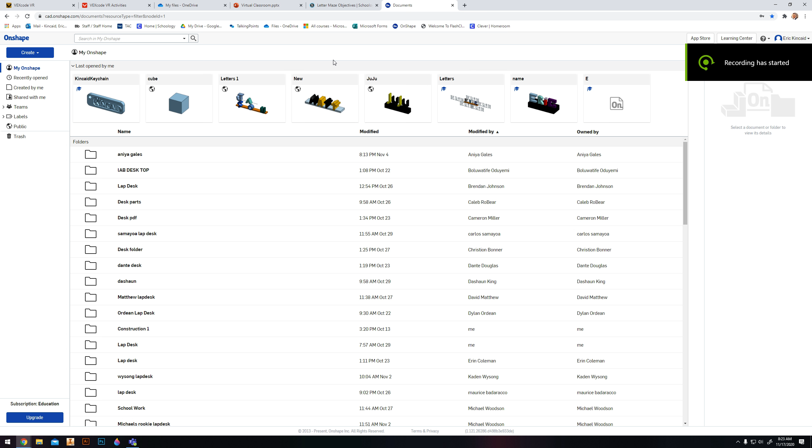Alright, good morning. We are going to begin our keychain assignment today, and we have all of the information from yesterday that we need dealing with the sizes of pretty much everything on this keychain. The only thing we missed was this radius here and the diameter of this circle. So I'm going to give that away right now.

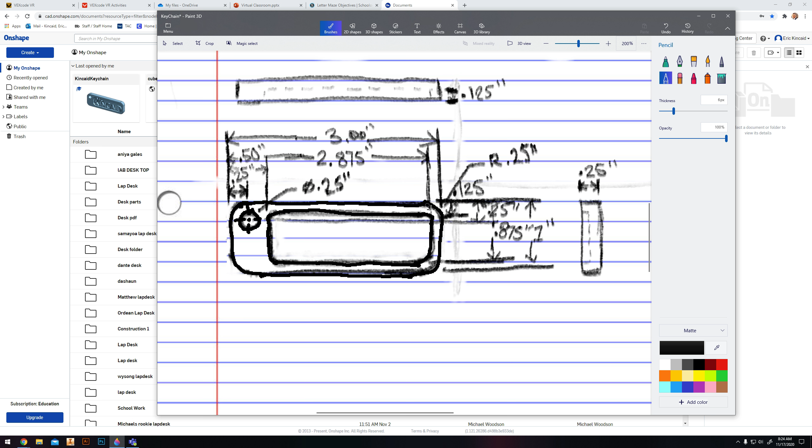That way we can get started with everything we possibly could need for this assignment. So this circle right here, that hole, this is the universal symbol for diameter, is 0.25 of an inch, so a quarter inch. And kind of hard to see, but this radius R is also 0.25 inches, right? So that's the radius on the outside of that keychain. Two dimensions that we missed that you will need in order to complete your assignment.

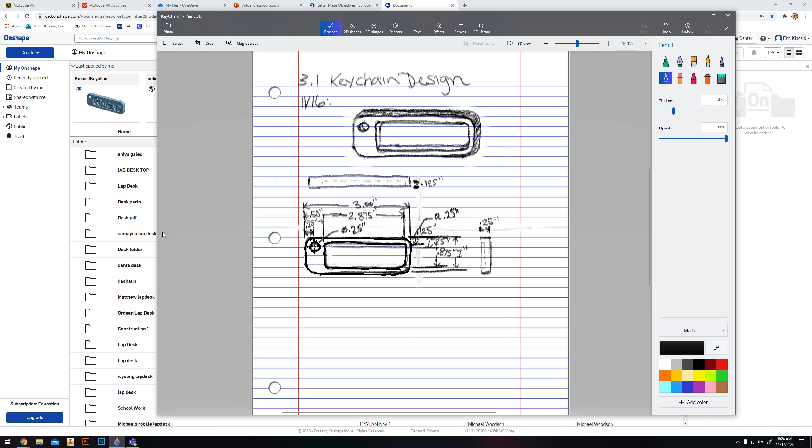So let's get started in OnShape. First thing we're going to do is create a new document. We're going to name it our last name and then keychain. And the first thing we're going to do is draw the outside and kind of work the outside in of this shape.

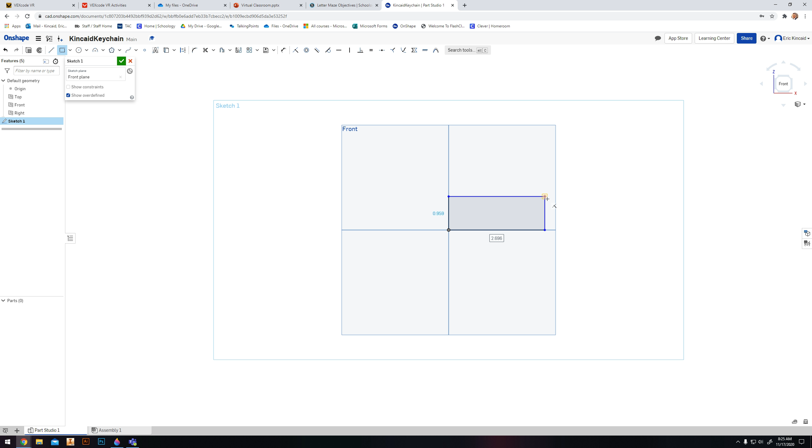So I'll create a new sketch on the front plane. Take my rectangle, and we're going to draw a rectangle first, and then we'll come back and round everything after with the fillet tool. Our dimensions based on that drawing was 3 inches by 1.

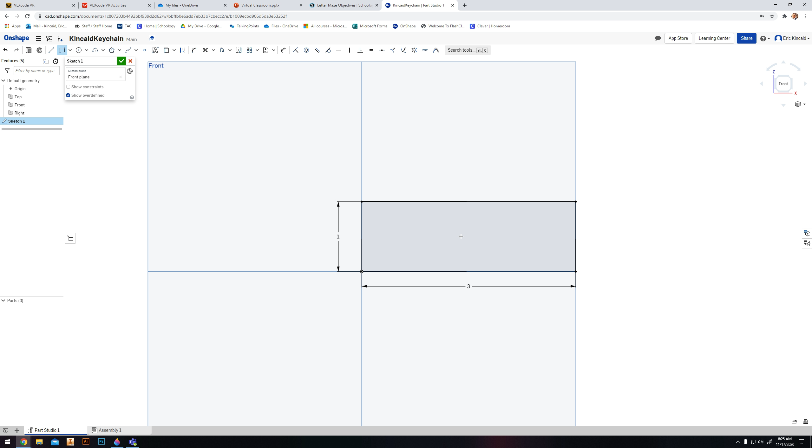And actually the next thing that we can do is add the hole in it, because we're going to extrude this to our overall shape. And then we'll be able to extrude that rounded rectangle inside the overall keychain shape. So I'm going to take my center point circle and we're going to create that first.

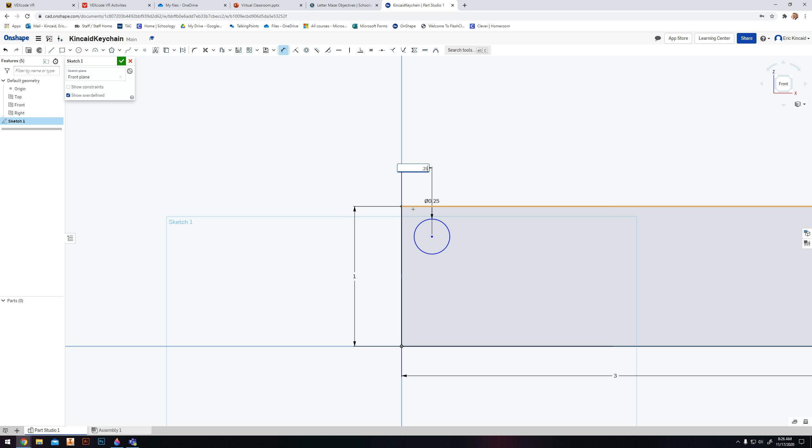So I'm just going to click somewhere in the top left corner of this rectangle. It doesn't matter. I'm going to make that 0.25. And I'll use my dimension tool to put that in the right place. Based off that drawing, from the center point to this edge, it's 0.25, and from the center point to the top edge, it's also 0.25.

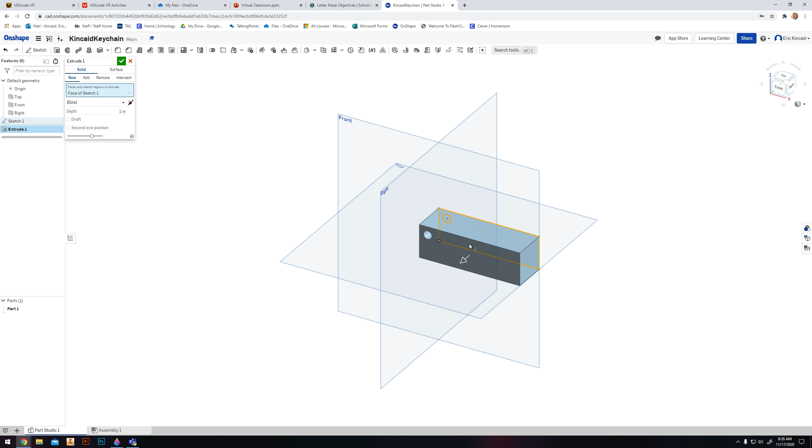And the reason that I do that first is so that once we extrude this, I can extrude that circle into my shape here anyway. So I'm going to extrude this 0.25 because it's a quarter of an inch for this keychain, and hit the check mark. That gives us a nice rectangle, not quite rounded yet, but we'll get there.

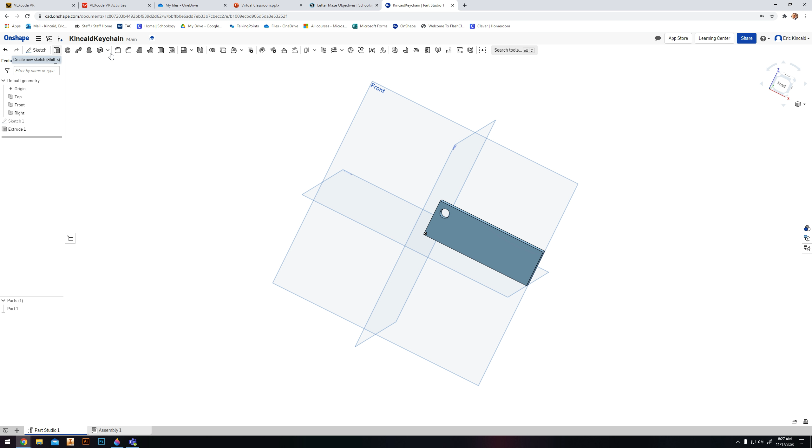And now we're going to use a trick to offset exactly where to put that rounded rectangle. So what I'm going to do is start a brand new sketch. This time I'm going to click on the front face of this shape so that I start the sketch on it.

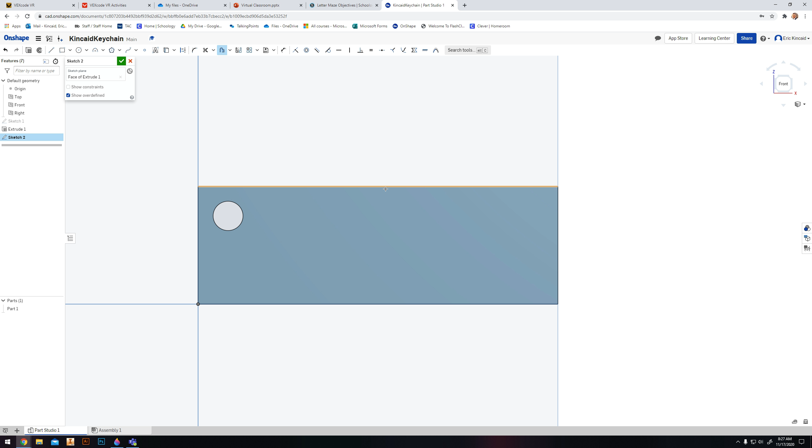And then I'm going to come up here to the offset tool. It's also the O. And if I click on the offset tool in the top part of my rectangle, you'll see it wants to draw a line that's 0.25 of an inch below it. Instead of 0.25, I'm going to make that 0.125. So I'm going to hit enter, type 0.125, and it'll draw that line right below it.

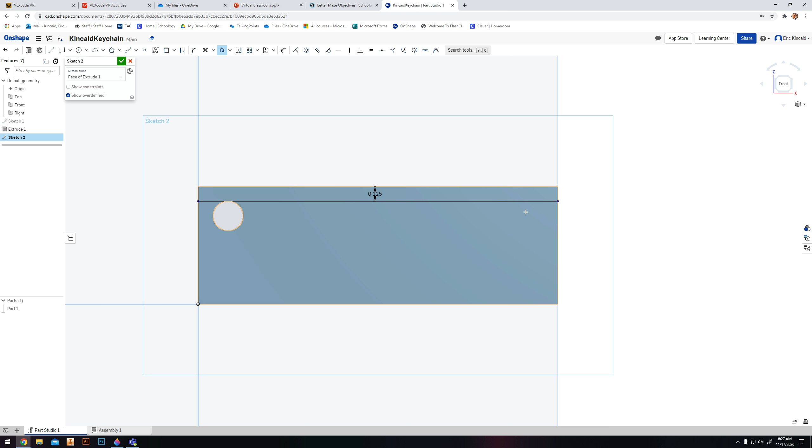And I'm going to do the same thing here. Move this back in, enter, 0.125. So all I did there was drag it from one side, so it'll do it again here. I'm just going to grab this arrow and pull it upwards instead of down. 0.125, enter.

And then for this last one, I'm going to offset it 0.5, and the reason for that is if we left it at 0.125 or anything like that, you would have your rectangle inside where your circle area is, or your circle area would be inside that rectangle rather. So we're going to make this 0.5, and then that pushes it out and away.

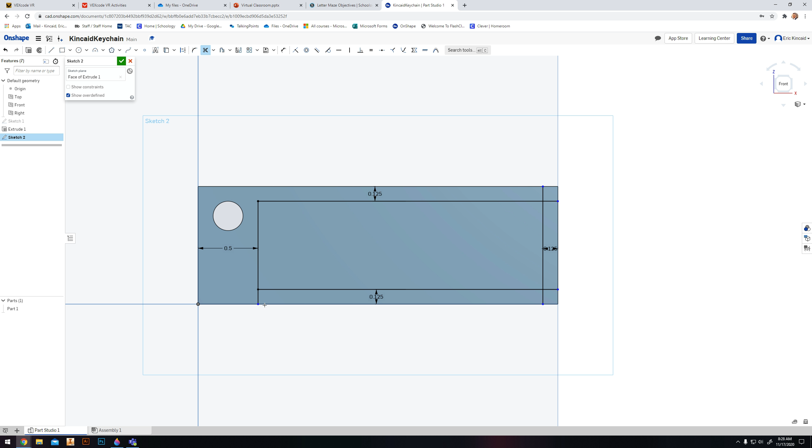Right, so I'll use M, my trim tool here, and I'm going to trim all the extra pieces so that I have just the rectangle left over. I'm just going to click on each of these. Whoops, clicked too many times. Control Z, undo. Trim, click, click, and you're left with a nice rectangle.

So we didn't fillet the sketch for the actual rectangle, the outer shape, but we are going to fillet this sketch before we extrude it inwards, because it makes it much easier to do now for this sketch. We don't have to worry about offsetting or anything like that.

So the reason we didn't fillet the sketch right off the bat is it doesn't let you offset your full lines all the way across. So by waiting, we're able to use that offset feature much quicker.

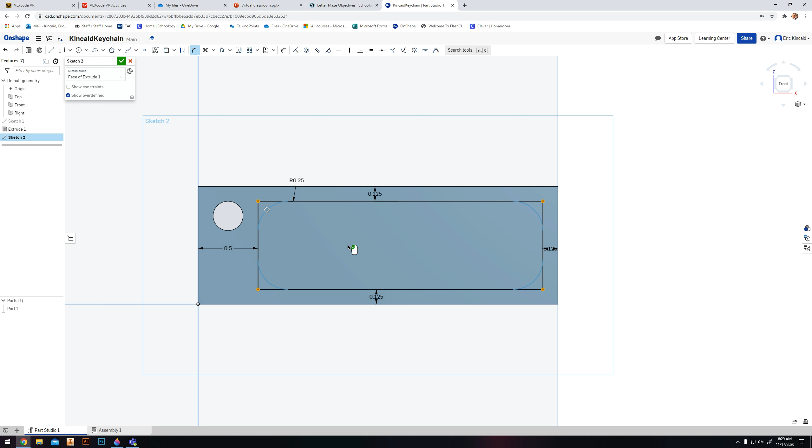So we're going to come up here to sketch fillet. That's Shift F on the keyboard, and we're just going to click our four corners and leave that radius to 0.25, and hit the check.

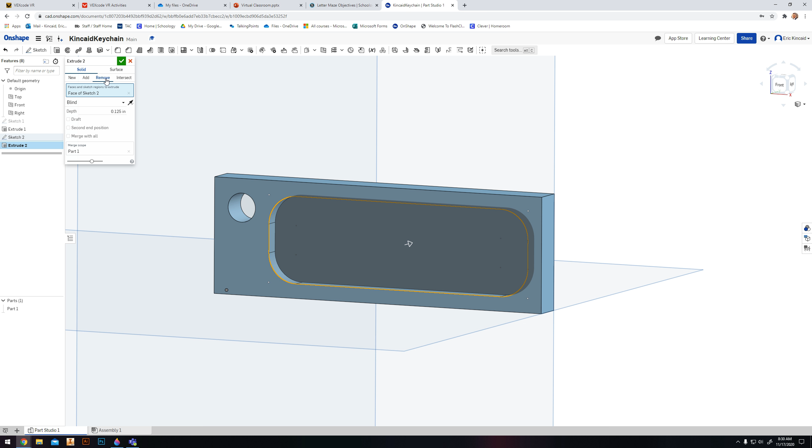Right, so it gives us that nice rounded rectangle area, and what we can do is click on it, and instead of the depth being 1 inch, we're going to make that depth 0.125 and remove. You have to click that remove portion in order to send it back the other way.

And that'll leave you with a nice cut in rounded rectangle. So the last thing we do before we add the text is we can finally fillet here. We could fillet those edges.

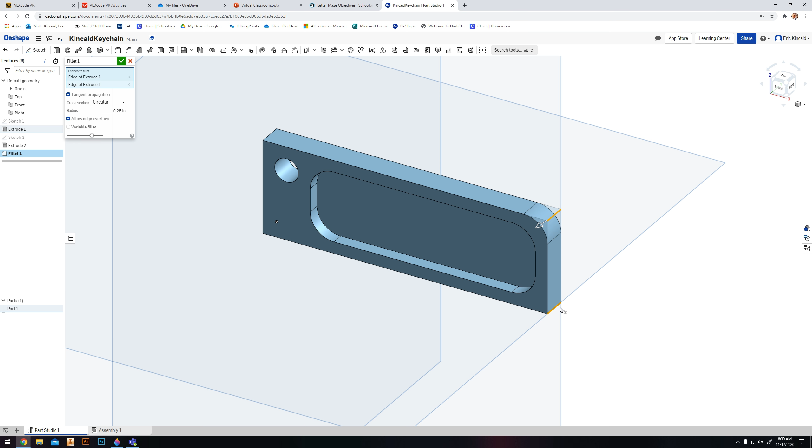The only thing you have to do is change the radius from 0.2 to 0.25. And then you can click on your four corners. You're probably going to have to rotate this one in order to get it. And check.

Alright, so that leaves us a nice keychain to work with. We can add some text to it.

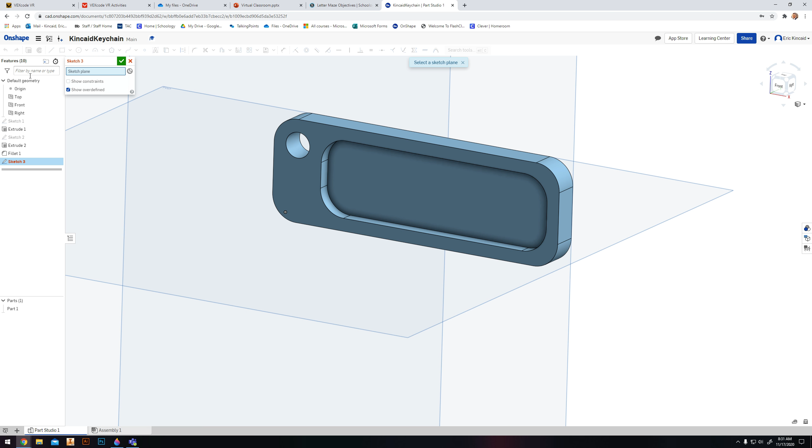In order to add some text to it, you can click on a new sketch. You're going to click on the inside face. You must click on the inside face.

And right here is the text tool. The text tool is very strange in the way that it works, and it's very hard to line up. So it's going to take a good bit of practice, but you can use the text tool and draw a rectangle on your shape here.

Try not to connect it to any point. So you see that yellow point, you see that point. Try not to even that one with the dotted lines, because if you leave it connected to that, it won't let you move your text around.

So if I was going to add my last name, you can see I made that box pretty big, so I'll have to shrink it down a bit.

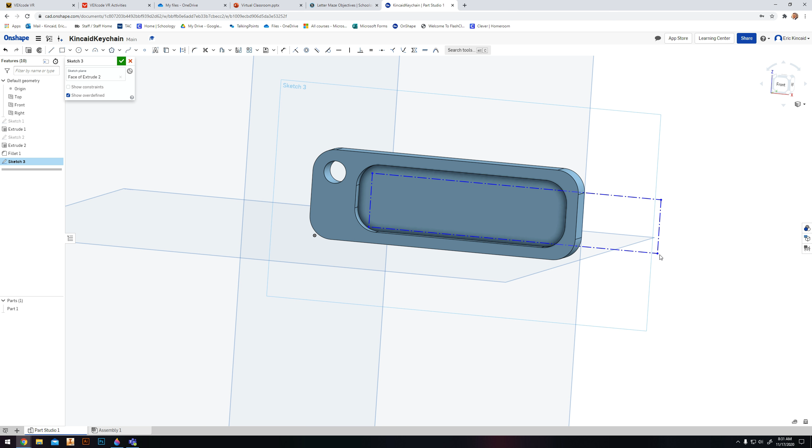To shrink it, you just click on whichever circle decides it wants to let you shrink it. I guess it's not going to let me.

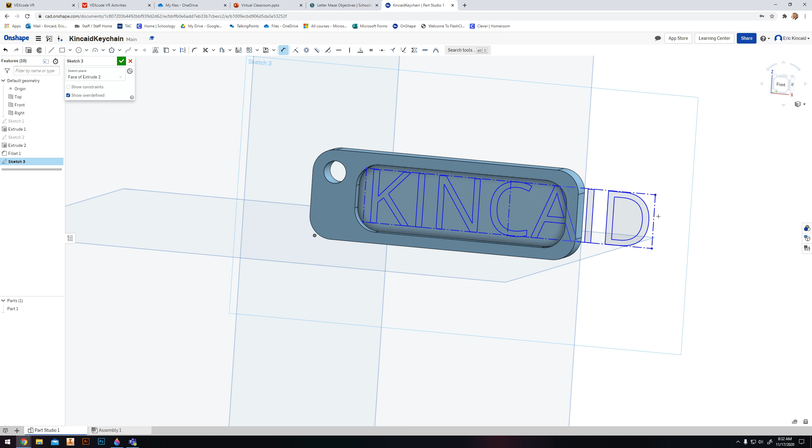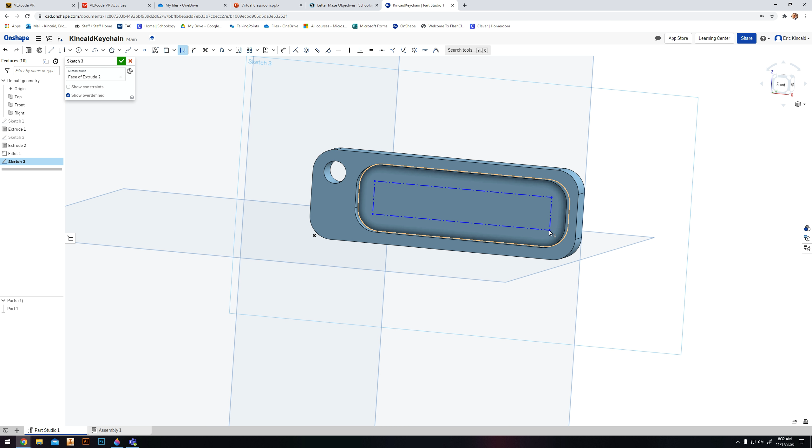You can also use the dimension tool to shrink it down. So if we said we only want this to be like 2.5 inches, still too big. 2. That'll at least get us inside that box there. So I'll just leave it like that, 2 inches.

Play around with it, make it look as best as you can. If you need to go back and edit that text, you can click it, right click, edit text, and it'll let you change it, you can make it bold, all kinds of stuff. So totally up to you on what you want to do. You can change the font.

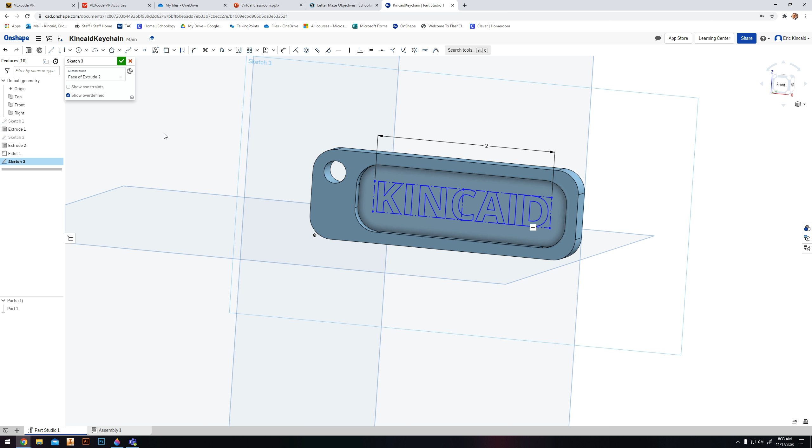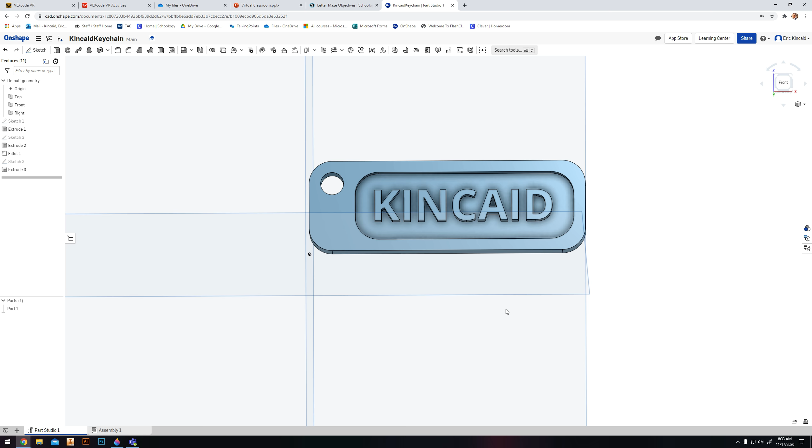But basically, you're going to hit the check mark, and we can extrude each letter, and by default it's way too far out, not 1. We're going to extrude that 0.125 and hit enter. And it'll be nice and flush with the front face.

Right, so pretty cool. When you're finished, you're going to share it, so hit share, go to Teams, and find your team. Click it, change Can Edit to Can View. We might need to change that later, but keep it on that for right now. Click this export button. That way I'll be able to export it because I'm going to need the files themselves to actually 3D print.